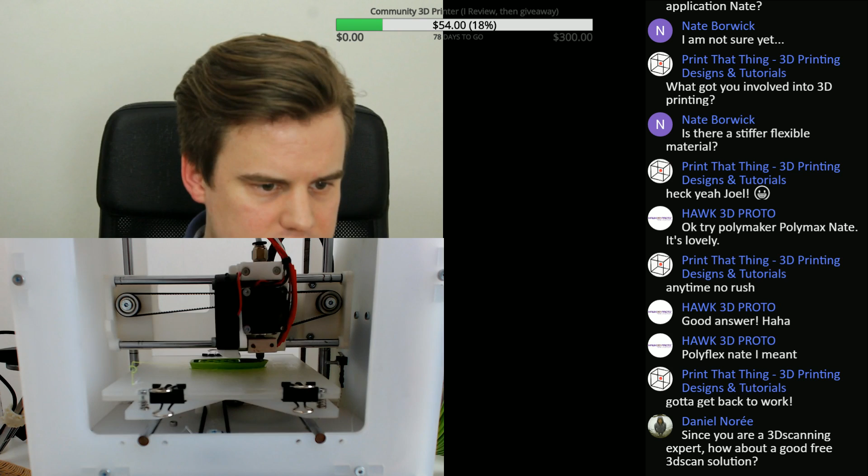Alright Jeff, what kind of material were you using? Let's see here if you answered. And Nate as well, you had a question about whether I have a semi-flexible material. Nate, as Ben at Hawk 3D Proto said there, you had some Polyflex. I'm not sure on the TPU or the Shore value of that, but for semi-flexible I use quite a lot of Echo TPU, which you can get in some different Shore values.

So I'm just going to explain here the Shore value. Let me see if I can find a good picture for you. Hey Sean Moth, thank you for being a subscriber.

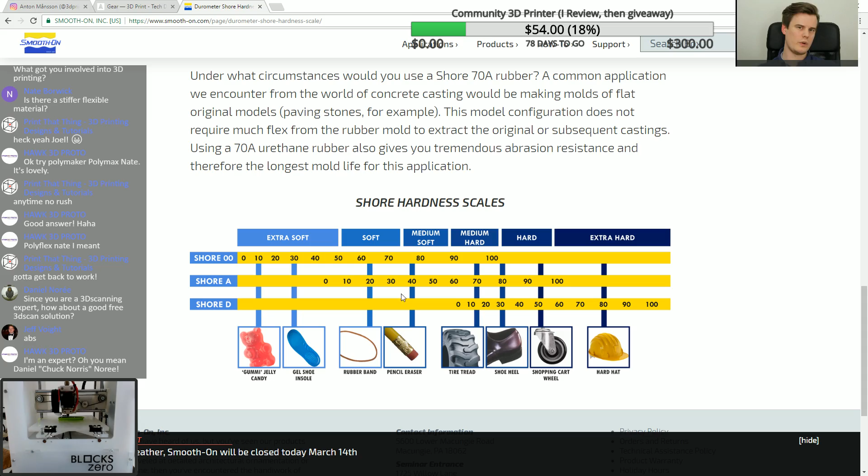I want to explain, when it comes to flexible materials like all the flexibles you were just talking about - Polyflex, Semiflex, NinjaFlex and stuff like that - Smooth-On has a really good Shore value reference here. For example, we usually work with a TPU or TPE combination that's around 85. I think NinjaFlex is around 80 or 85 Shore A. I usually work with that up to 95, which I think is really easy to use. But we also work in the D scale, which is harder - a 60D is actually harder than a 90A, for example. So in the D scale, 60 to 64 makes for really cool applications.

3D scanning expert, alright, thanks. For free 3D scanning there are a few options, it depends a little bit. I think photogrammetry is a really good way to go, and I think Autodesk has a solution to take pictures. Let me just check here again.

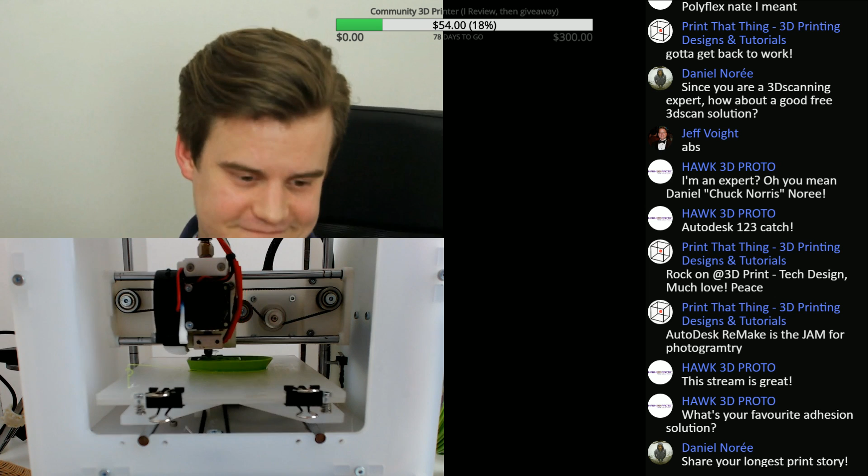Share my longest print story. Wow, I think the longest ones are the ones I still haven't tried. What's my longest story?

Well, I've been printing a Ferrari Enzo, which is a mod for Daniel's OpenRC. I've been printing that for quite a long time and it's still not finished, and that's a lot of parts. I'm also printing a Ducati motorcycle at a big scale, but I did the first file like a year ago and still haven't completed it all. So my longest 3D print is still not finished.

But the longest single print, I think, is around 80 or 90 hours, and I think we did that on the Ultimaker 2 or 2 Plus, Ultimaker 2 I think it was.

Yeah Ben, I think Printafix - I don't think I've tried it actually. I haven't tried Printafix on the ZYYX+ yet. I was afraid it would interfere with the special material on the ZYYX build plates, so I don't think I've tried it. I'm not sure.

Wow, thank you very much, Joel. Thank you very much, it helps a lot. I help you as well, and you help me. It's great, so high five to you. Have a great day at work. I'll see you later.

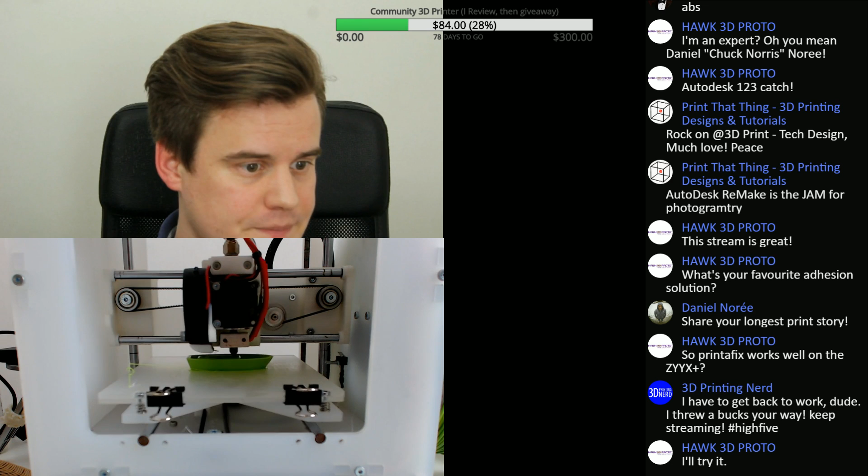My favorite printer - oh yes, sorry about that, I saw that you answered before. The printer running in the background right now is a Blockstech Zero. It was a crowdfunded machine that I think is in shipping right now, so this was a pre-production sample for review. I'm keeping it as long as they're still in production, so as soon as they go into production, I think I'll return this back to the guys at Blockstech.

Got a little bit of lag there, I think. Should be back, yeah, that's back. So the Blockstech, it's a PLA printer with like 120 by 140 millimeter and 120 tall build volume. That's also really simple to use and a proper volume, a really good volume to work within.

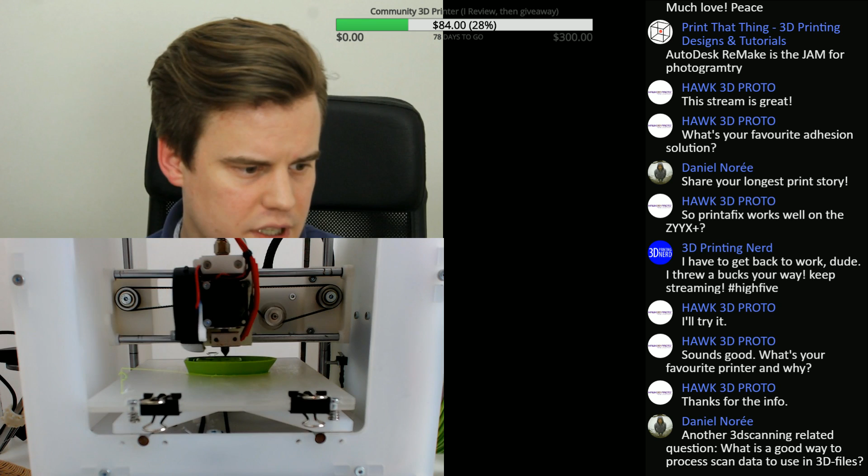Right now it's running PLA from Filamentive, which is another great supplier in the UK. Maybe you know of them, Hawk, Ben there, maybe you've seen Filamentive - great guys. They make a really good filament that has some really vivid colors, I really like the colors. And the machine itself is small, nifty, quiet, and quite cheap as well. So it's a good recommendation.

Let's see, we have another question here. Daniel asks another 3D scanning related question: what is a good way to process scan data to use in 3D files? Well, processing scan data is difficult - you want to create like an object, so you really want to create a... what's it called?

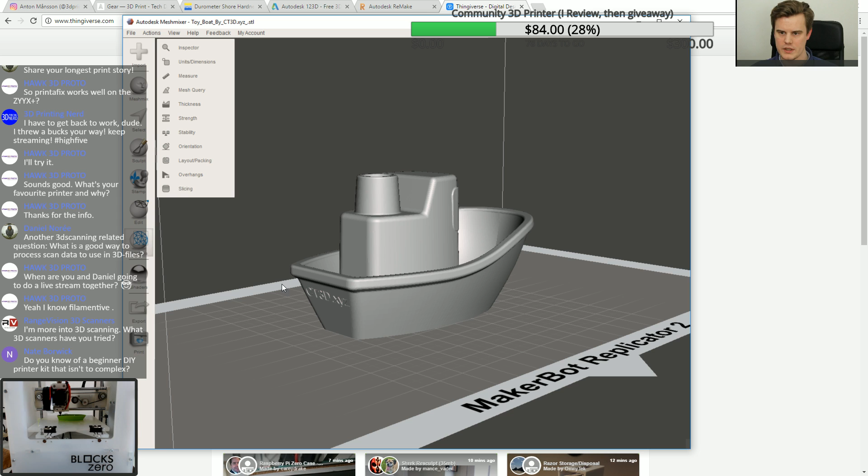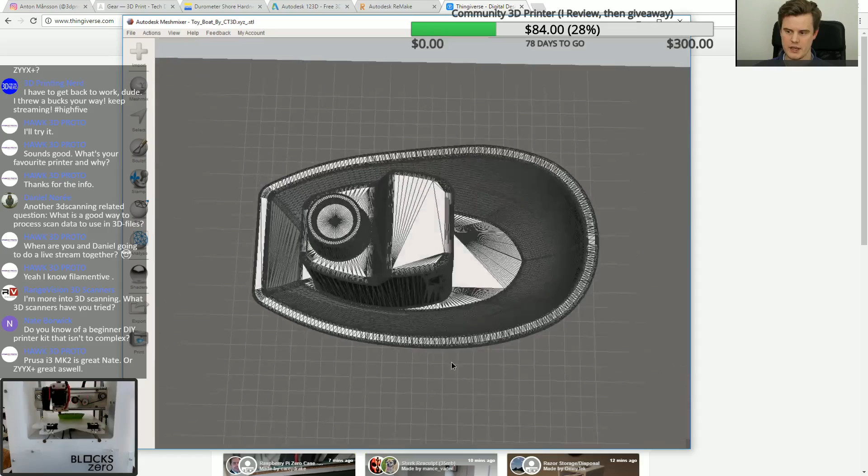So if we can just visualize here, I want to show you the triangles - view, show wireframe. Any STL file consists of all these small triangles. You can kind of see that this model here is generated from a CAD software, because it's really evenly sorted out and it's really easy to understand. So that file is easily modelable, but no scan data comes like this, though it usually comes a little bit more rough or a little bit smoothed out. I usually say that 3D scanning is like taking a photograph slightly out of focus.

So I'm going to show you a different scan here, if we can just get a good example.

Let's say that, yeah, this could be a scan as well. I'm just going to download here. Wow, 50 megabytes, that's quite a lot. I'm going to download this here and just show you the difference.

So the difference when you get a scan file is that it doesn't really work the same way. It's very difficult to do anything about it. So you want to convert that STL file or use it in some software that you can then analyze.

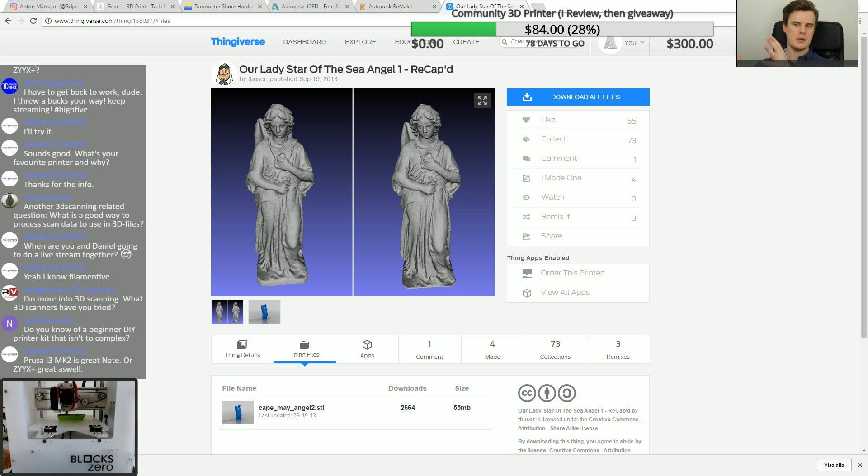So let's just start off, go back one step to 3D scanning. Why do you do 3D scanning? Well, it's either because you want to copy the object, you want to create a new model, or maybe you don't have the drawings for it, so you need them.

The other application is where you want to restore, or maybe like cultural heritage, where you want to keep the model. And the third one is when you want to measure on a model. So you have three applications, each require different post-processing.

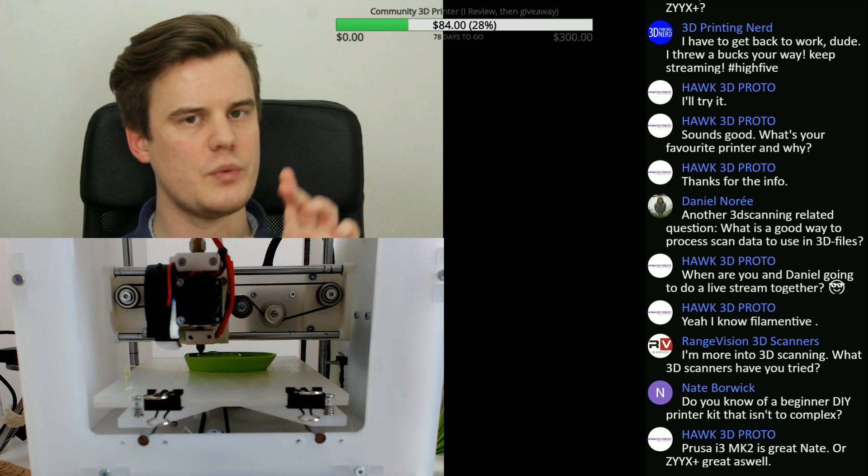Let's say that you want to copy an object first, because that's probably what the enthusiasts do mostly. So you have an object, let's say I have my headphones here, and I want to scan them because I want to remodel this or make like a holder or something on this. If I scan this, I will get a really soft image of it.

I won't get any of the sharp edges. I won't have any logic in the file understanding that, well, this is a soft part, this is not soft, this is an even chamfer all over the model. You don't get any of that data into a 3D scan.

So what you can do quite easily is remodel it yourself. So when you have an STL file, you can figure out what features were thought of. For example, if we do a face, it's really difficult to analyze that. But if you do an object, you can understand how it was created and recreate it yourself.

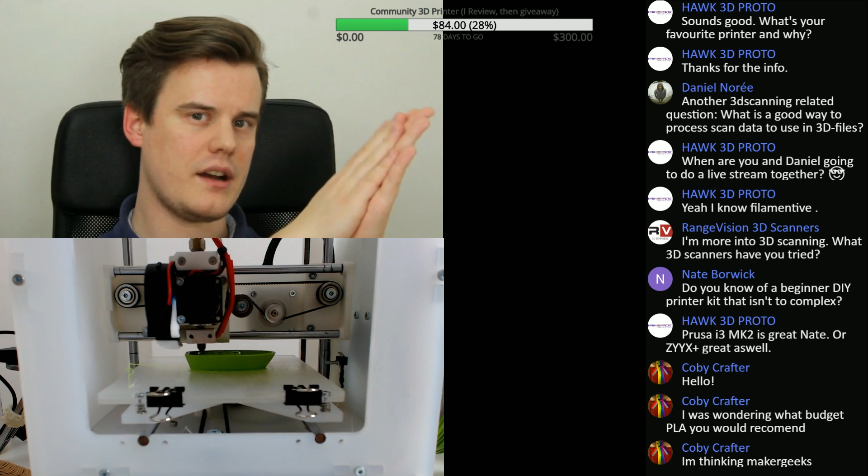So you have these different applications, and they all require different post-processing. But to be honest, there's no cheap or simple way to analyze scan data in a good way. So usually when you get a scanner, you should be prepared to put almost equal budget into software that you then use to do these kinds of applications quickly.

Was that a good enough answer, or was it just too long of ranting? Sorry about that. Okay Nate, I'm gonna jump into your questions here.

Do you know of a beginner do-it-yourself printer kit that isn't too complex? Hawk there, Ben over at Hawk said Prusa i3 Mark II, and I believe him completely. I've heard so much good about the Mark II. Joel Telling at 3D Printer Nerd made a good video about it. Tom's made a good video. There's a bunch of guys who've made good videos on the Prusa i3 Mark II. Personally, I've never tried it yet. I've only heard good things about it.

But I've also heard that it is a do-it-yourself kit. It is like for the hardcore printer user. Depending on what type of customer you are, the one who wants to print and not care about the machine, but just wants cool designs, maybe it's not the correct first printer. But if you want to get into the hobby and have as good a printer as possible, to get to know the printer and the hardcore G-codes and open source and building and linear bearings and stuff like that, if you're a geek in that matter, I think this is a perfect machine as far as I've heard. But it is quite a distinction between wanting a finished machine and wanting to get to know your machine.

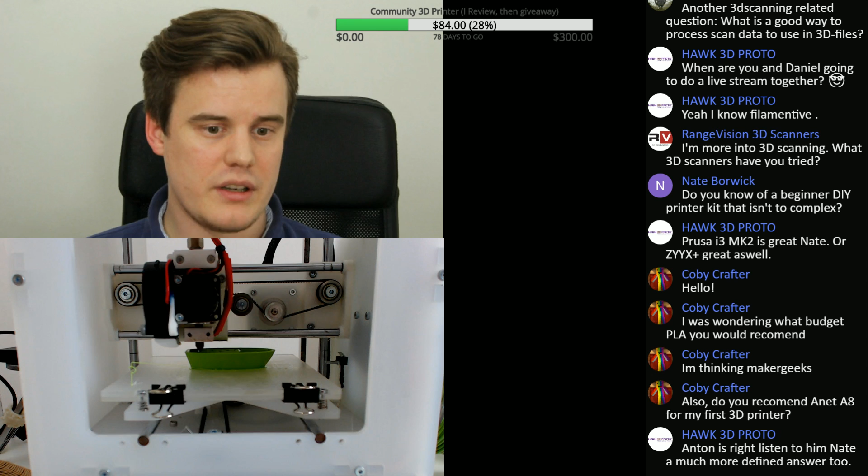I think that really depends on where you're located, because budget really matters depending on region. If you're in the US, I think you should go to, for example, MatterHackers. They have some good options. The second one, the one where you want to get into the printer, is up to budget-wise, I think.

The Anet A8, I think that's a little bit cheaper than the Prusa Mark II. So if you can get a building kit for that one, maybe try it out, but be prepared to have less reliability on electronics and stuff like that. But I'm not sure, I haven't tried either one. I've just seen other people use them, so I don't have any hands-on experience with either one.

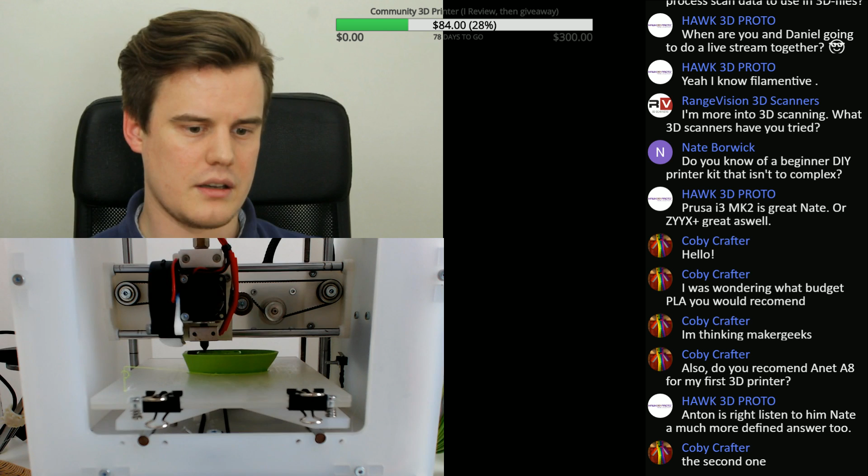The printer I'm listing here, the community 3D printer, I'm looking into buying like an A8 or maybe a Maker Gear or something like that, and together with you guys review it, test it out, try different things, and then after a month or two I will give it away to one of the contributors. So if you put in $1, you'll be in the giveaway. That's my plan with this community printer, and I think everyone who contributes will get a vote on what printer to buy. That's what I want to try to establish.

RangeVision - do you have any other questions about 3D scanning, for example? Is there anything you are curious about? I'm sure that you know quite a lot as well.

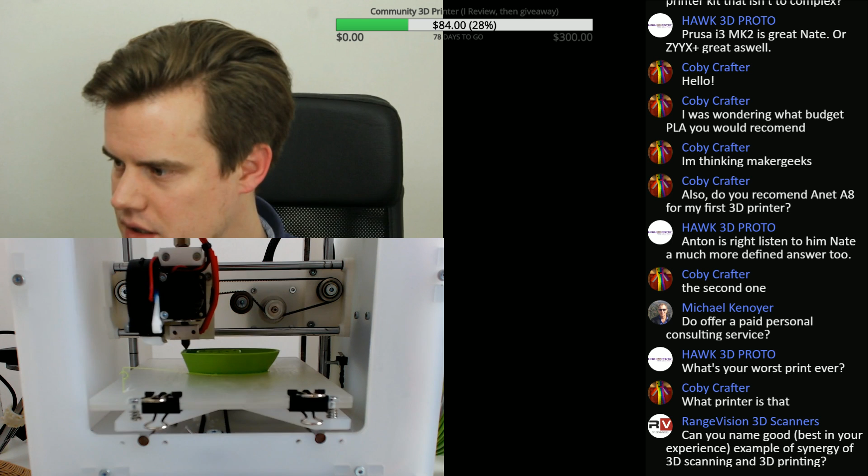I do have a design that I did myself, and I'm the expert here. I did a design that is just terrible when it comes to warping, and I've tried so many times on different machines, and it's really difficult. It consists of just a few centimeters wide, and then 2 or 3 centimeters deep and tall, and it's made of ABS, but the design itself will really just warp. So I've tried HIPS, ABS, PLA. PLA is okay, but it still kind of warps. So that's my worst model ever - it's a constant nightmare, I constantly have to dry out my materials just to even try to do it.

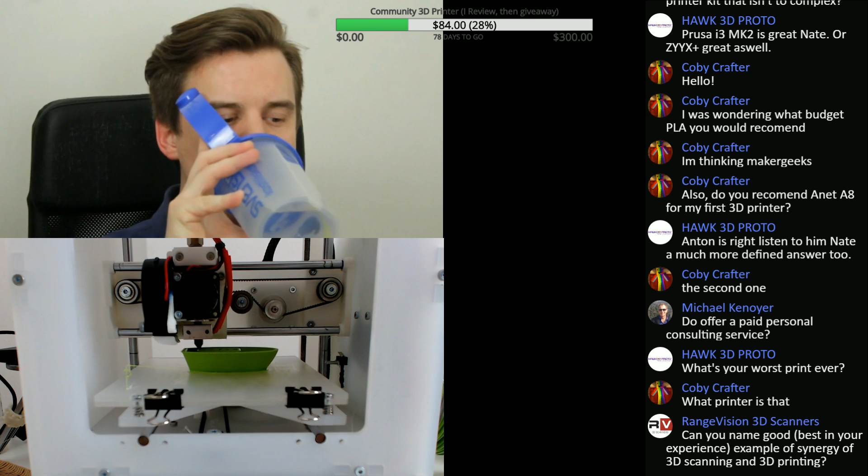Sorry about that. You need some water sometime when talking.

Yeah Coby, so it's a Blocks Zero. I'll send you the design, Ben. I promise it will be difficult, especially in some other material than PLA. So ABS for example, or PETG, I've had it work with. I'd say PETG is a safe bet, or ABS or some copolymer that is really strong. I'll send it to you later.

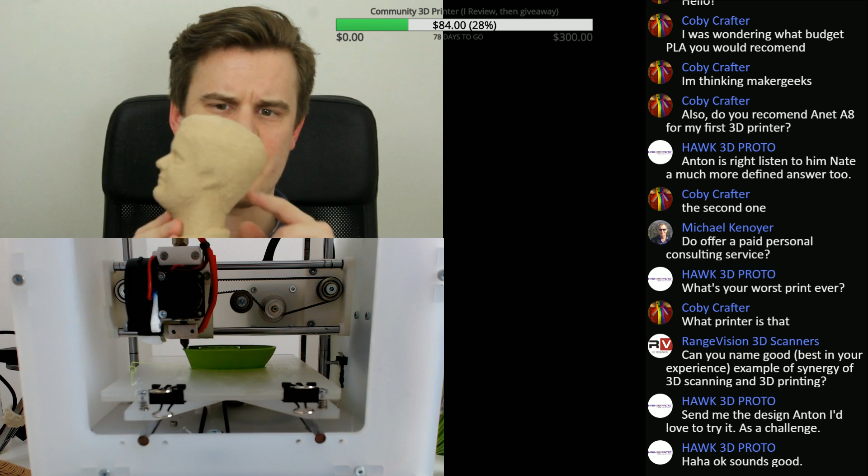Range Vision asks, can you name the best example from your experience of synergy between 3D scanning and 3D printing? It's a really good question. I think for me, the solution I've tried is the 3D Systems Sense, actually the Sense 2. It's a quite bad scanner when it comes to resolution and precision, but it's super easy to use. For example, this one here is made with it, then printed on a 1.2 millimeter nozzle trying to do like wooden, but it just craps out. It's good that it's not sharp, but the layers here are really bad. The scanning, though, is good.

See you later, Ben. Thanks for stopping by and for bringing in some questions. So I'll see you later.

So synergy between scanning and printing is difficult because you need resolution to do a good print, but you also need to take care of fixing holes. You don't want to have any holes from the scanning. When using the 3D Systems Sense solution, not the iSense, because the iSense is on iPads and it's crappy and difficult to handle. When you scan on a PC, the software lets you create a watertight model. If you scan, for example, a face, you can even select the face as the target scan and it will automatically do a bounding box. You don't scan anything outside of the face. It would also help you cut for your shoulders to make a bust, and basically just fill in any holes that you don't get.

So I think that's a really good synergy for scanning people, for example at a trade fair, or scanning your friends and family who don't understand that you need to sit still for a 3D scan. They don't understand all that. With the Sense solution, it's really simple to do a quick scan and get a good result that you can then just send to the printer. You also get color data, so if you have a color printer like the 3D Systems ProJet, or old Z Corp printers, SLS, or multi-jet, whatever it's called, you can get all the color data on the model, which is pretty cool. Otherwise for synergy,

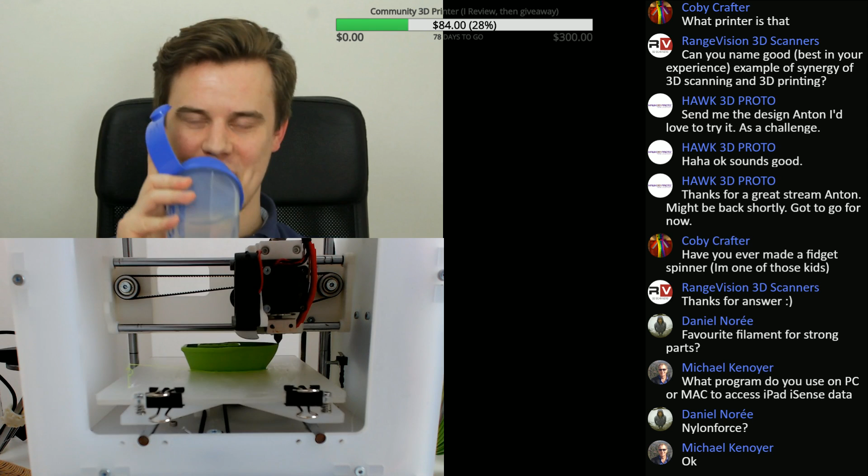What else? Can anyone guess what I'm printing, by the way? You do see there's a printer going on, right? Can you guess what it is? Daniel is not allowed to guess. Let me see. I think you can... I think there should be any. Let me just see. But did you? Yeah, it's the boat. But it's not the Benchy. It's not the Benchy boat. It actually isn't the Benchy range vision. It's it may be from the same creator. Who knows?

So yeah, Michael, were you thinking about some sort of... you said to access the data. Are you also interested in how to process the data, or are you just focusing on accessing the data? Hey, Hawk and Ben, welcome back. You missed a lot. Let's see here. All right.

I had a question here before as well. What's your favorite 3D design I printed? Well, my favorite design is probably Daniel's OpenRC F1 car.

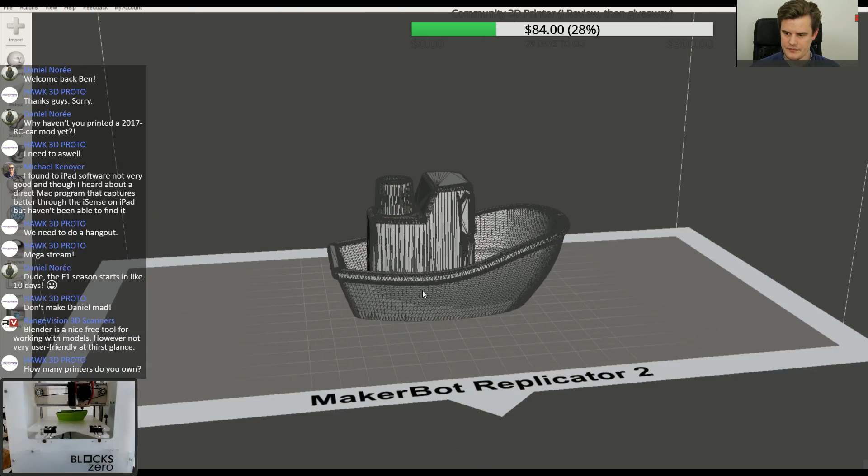Let's see, what do we have printing? Oh yeah, of course, I showed you guys the boat before, so of course you're gonna guess it's right. Yeah, it's this boat. Wait, the screen is not showing? One second. That's that model. Let's see, so that's the model that's printing right now.

Imran Salik asks, what program does a 3D printer use? Well, there's several steps for a 3D printer. You don't only have one software that controls everything, but you can usually use several ones. When it comes to 3D printing, you have 3 steps. First you have the model - it can be created yourself, scanned, or downloaded. Then you have a software that translates the 3D data into machine code - this software is called a slicer - and that software then goes into the 3D printer. So I guess that this software, the slicer, is what you're asking about.

There are several different types of software. One really good one that's free is called Cura, C-U-R-A. It's easy to use, has all the tools that you need, but it's also complicated - there's a lot of settings you can set. Then you also have a paid version called Simplify 3D. It's a super nice software, has great features, can be easy or complicated, depends on what you want.

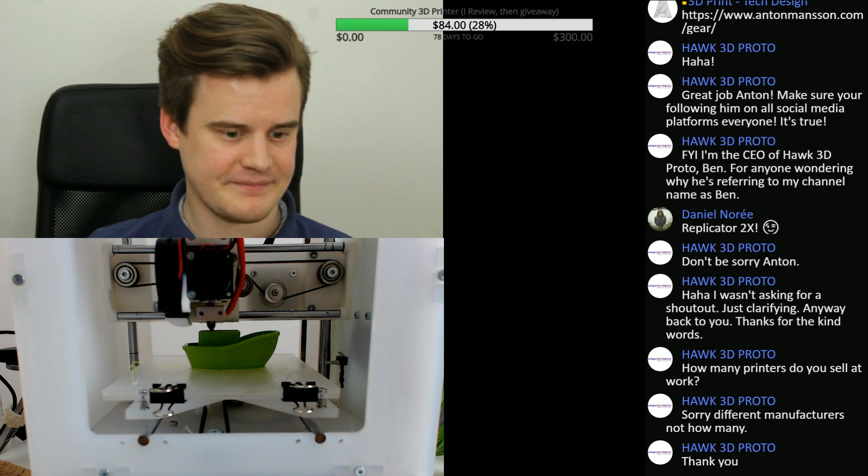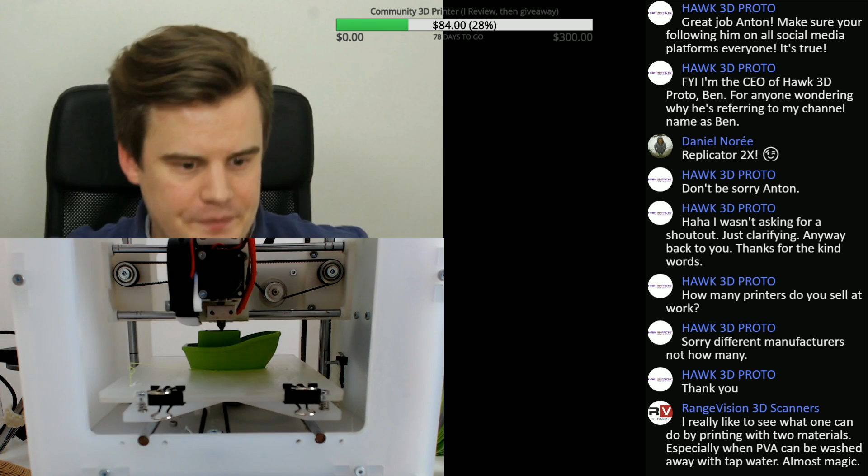Yeah, range vision - I do have a pretty cool video on that somewhere, like PVA washed away and stuff. I noticed someone did a carbon fiber experiment. I printed models in PVA, then wrapped different types of fibers and resin on it. I haven't made it into a video yet, but I saw a company made a big article about using carbon fiber professionally, with vacuum pumps and heating chambers. I just did it for fun, and showed it on my previous stream.

Maybe I can get that up quickly here. Just give me a second and I'll try. Yeah, here we go, if I can access that file.

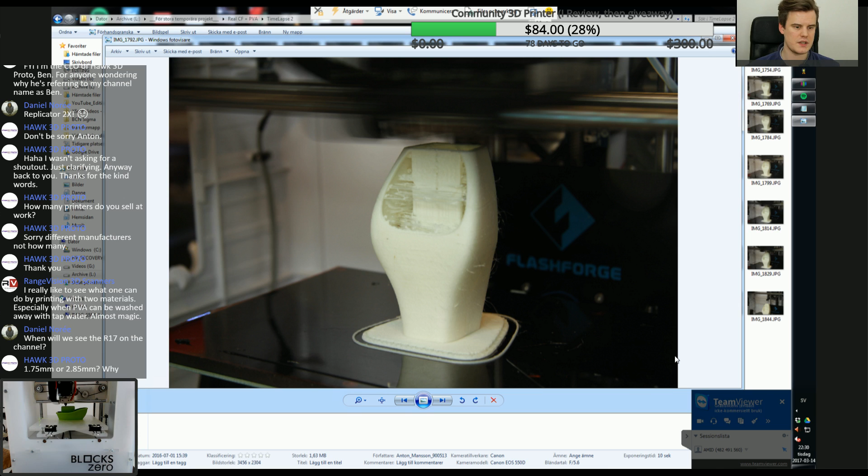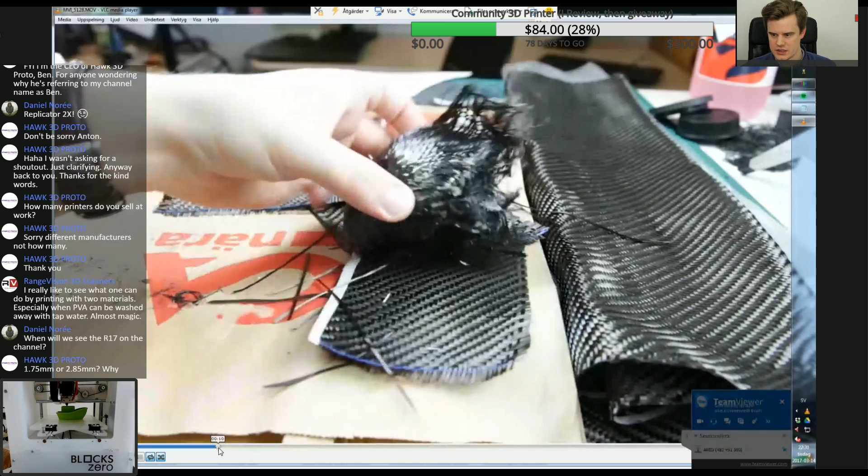You see, maybe I can take one at a time. If you see this image here, this is PVA printed in the Dreamer, but just PVA, nothing else, just normal PVA. I just want to show you guys the timestamps - this is from mid 2016. I just want to say I was first... no, I'm just kidding.

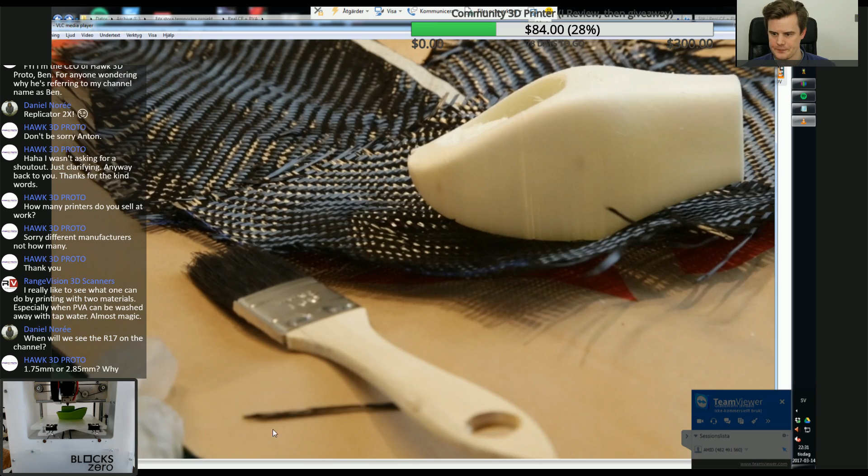So then we took - yeah, that's carbon fiber. It's not so nice, let me see here. Maybe what is a good example? Yeah, maybe here. So I took that and cured some resin and then started to apply it on the model. Maybe not in that video, maybe in this one - yeah, so I started to apply carbon fiber on the PVA.

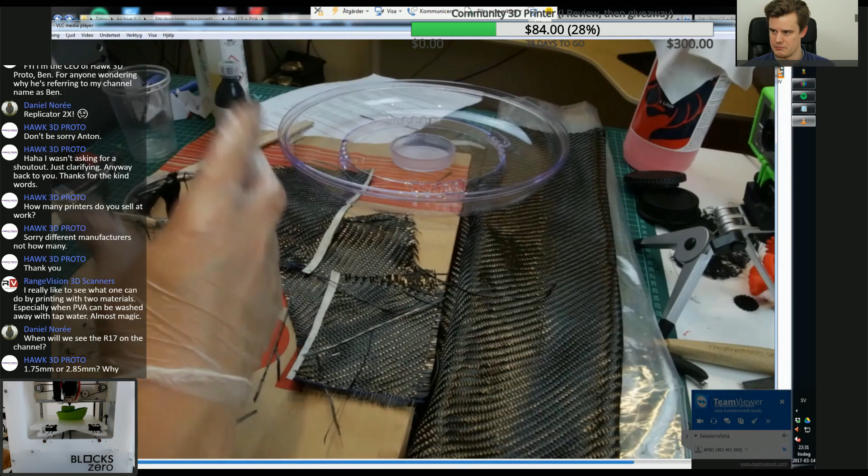And yeah, I just worked with that. It's really, really difficult, but I kind of did it, and I think I ended up with a... yeah, I did talk about it, but I'm not sure if I'm finished with that video. Whoops, never mind, let's put that away. So for PVA, I'm working on some fun stuff there, and hopefully that video will be done sometime soon. But it's a long-going project, and it's quite difficult to put down into a good video as well.

Hawk 3D Proto asks 1.75 millimeter or 2.85 millimeters, and why? Well, again, depends on your printer, but for me, 3 millimeters - when it comes to PLA, it's more difficult to bend inside of a tube because it's more mass, but it works better on light machines. In general it's easier to load and unload, but also a little bit more difficult on flexible materials. But flexible materials on 1.75 is also difficult.

So I'd say choose either depending on whether you're going direct drive or Bowden drive. I don't see a lot of Bowden 1.75. The Blocks, for example, is Bowden 1.75, but it's a really short distance so it doesn't have to be thicker. But when you look at Ultimaker, the BCN, and basically any bigger machine with Bowden, they only run 2.85. And 1.75 is more common for direct drive because it's narrower and more common material. So unfortunately we have to have 2.85 as well, but in general most printers run 1.75. So that's about it.

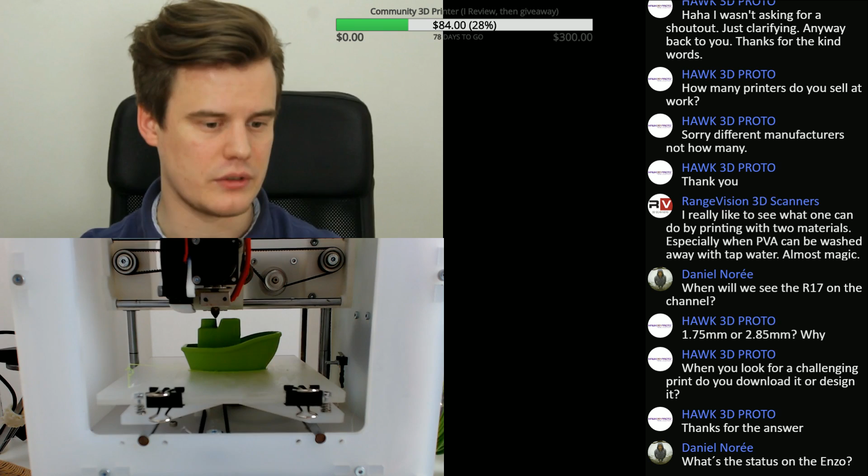I'm going to show you guys, if you're new to the stream and haven't seen my long-going project: I've been sculpting a Ferrari Enzo mod for the OpenRC Formula 1 car, which you can download from Barspin at Thingiverse, or from Daniel Norée, who asked the question here in chat. Just give me one second, I'll start Fusion and give you a fast glimpse of what I'm doing.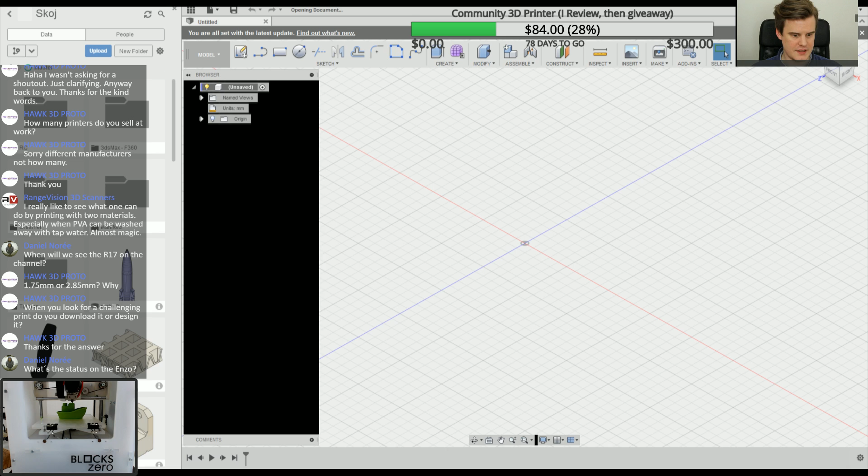So Daniel, the status on the Enzo is that it's loading, not only for me, but for the creation as well.

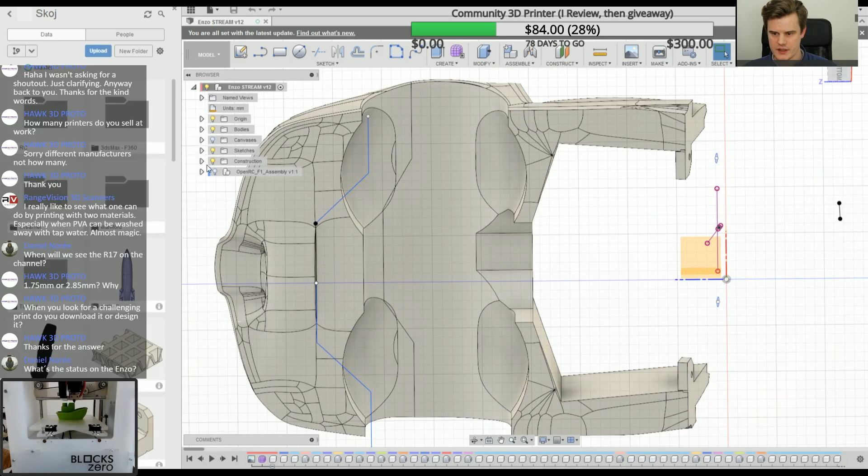So this is the front of the Enzo. The whole idea is that I take the original design from Daniel and make sure all the wheels and stuff can still spin. That's why I'm trying out these big lumps here, to make sure the wheels will still work, so you don't have to change that. You do, however, have to change these two plates here.

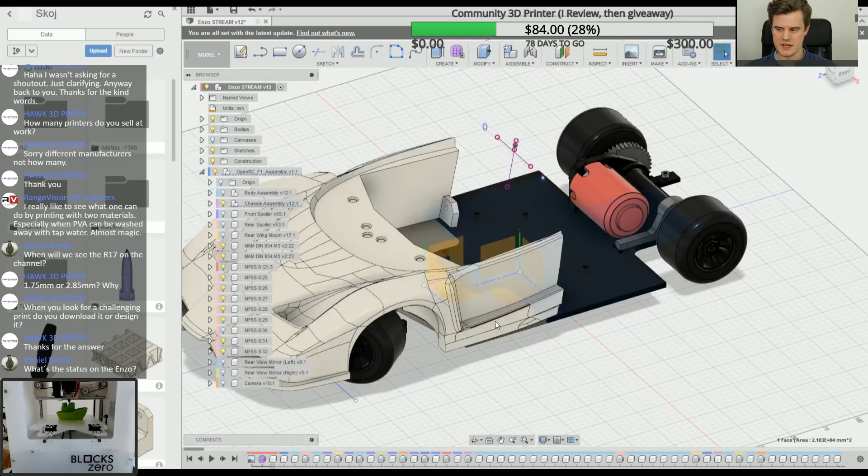I made them a little bit wider to make space for the cover. I can probably narrow them down, but then you get an open hole here, and this area would be open and let in a lot of water and dirt into the electronics. So you should probably print these two plates as well.

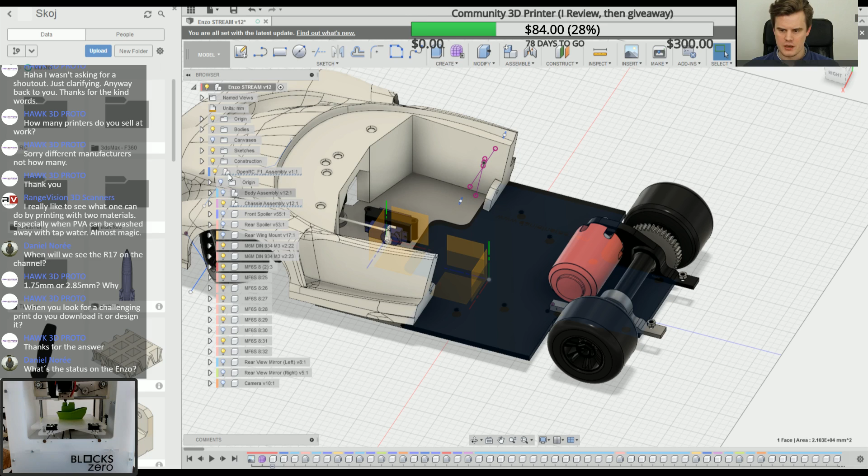But then you have, let's see, I do have more of this car, I promise. Whoops.

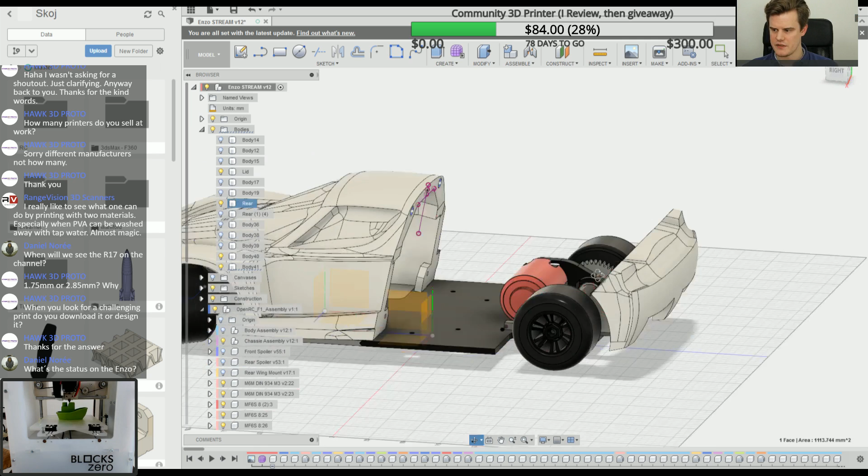So you have the lid, which will hopefully just attach by magnets, giving you a cover as well. I don't think it will be dual extrusion see-through or anything like that, maybe not. And you have the rear parts as well, and the midsection, which is this one. So you get all these sections.

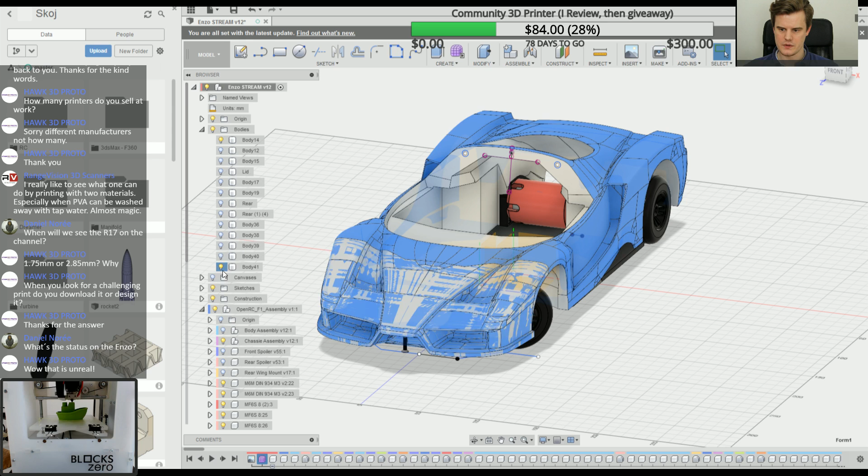The idea is to make it printable, but it's taking a lot of time. All this here is sculpted from one form, so I can probably show you guys that form... no, I cannot. But I started off with one form and just worked my way through it. Pretty fun actually to do free-form sculpting, just using the sculpt tools here.

So that's the status on the Enzo, it's taking a lot of time. Sorry about that, I know I promised it earlier, but yeah, it takes time.

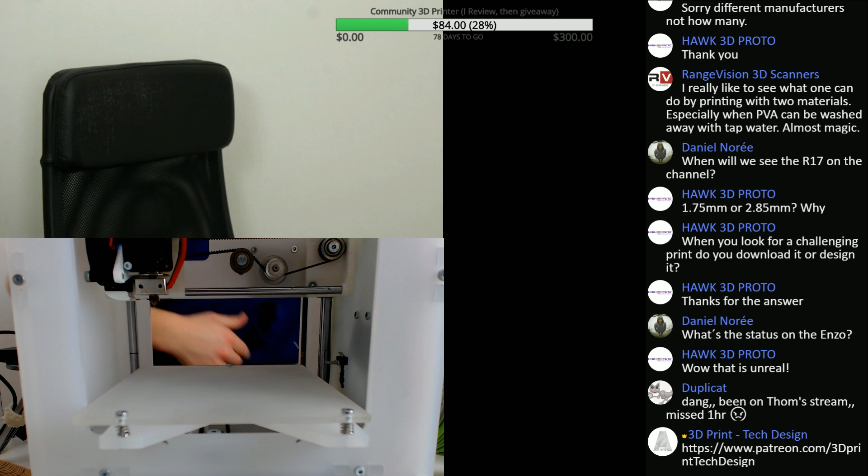That went flying, let's see. Here we have it, can you see it? Come on, out of focus. Yeah, that looks pretty good.

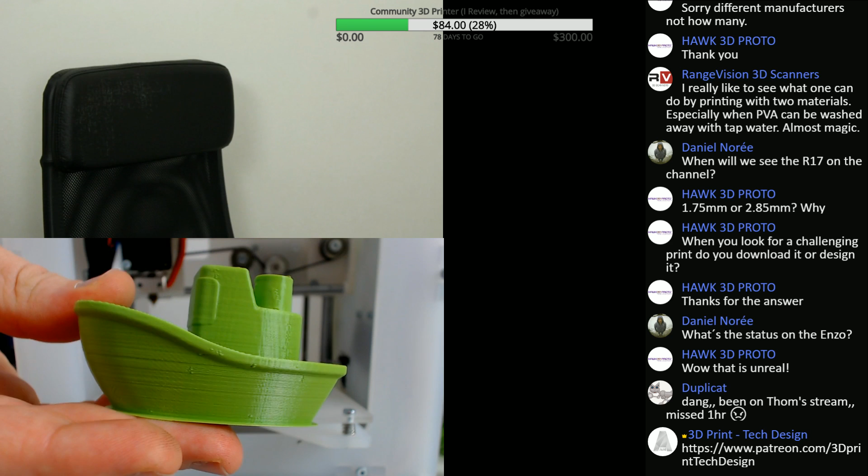That's a pretty decent model. It's made in the Blocks Zero in medium resolution, in Cura, a little bit higher speed, in filament RPLA green.

Carry on for another hour. Well, wow. Maybe, yeah, I think this has to be all for today.

I think that will maybe happen next week on Tuesday as well. I'll check if there's any ongoing stream, maybe I will not do it then. I know Tom is in the same time zone as me, so I'll probably check if he's doing something, or maybe I can do another day. All the other guys are in the US, so luckily I can kind of miss their time schedules, or unluckily. Yeah, never mind, I think that would be great.

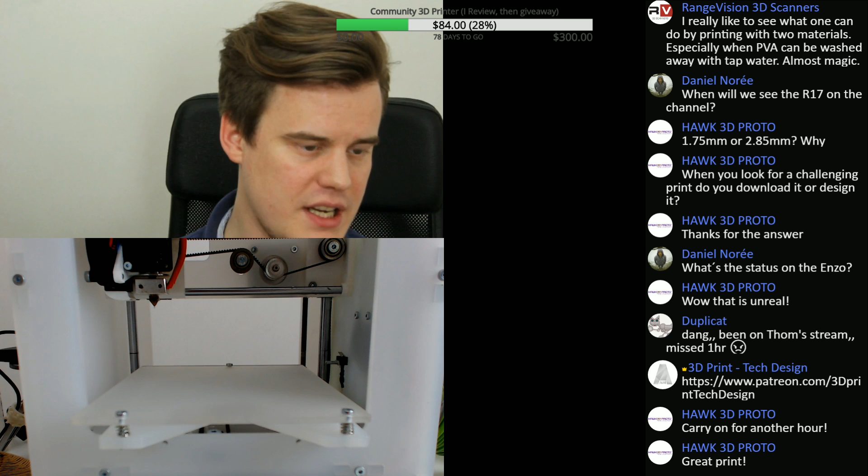So any last questions? For the blocks, I'm currently using Cura. I haven't had any good profile with Simplify3D and haven't had time to do anything. I think that Dustin, Jetman, has done a profile, but I haven't asked for it yet, so hopefully I can get it. But I want to try to make my own just to learn a little bit first. But Jetman has one, if you need one, you can probably make a shout out to him.